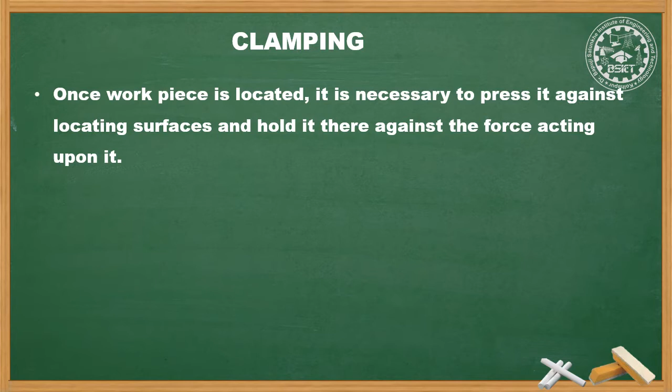Starting with clamping. Once the workpiece is located completely, it is necessary to press it against the locating surface and hold it there against the force acting upon it. For this purpose, clamping is necessary. The tool designer refers to this action as clamping, and the mechanisms used for this action are known as clamps.

To restrict the workpiece completely, a clamping device is necessary in addition to the locating device in a jig and fixture. A clamping device holds the workpiece securely in the jig or fixture against the force applied over it during an operation. A clamping device is incorporated into the fixture with a proper clamp, and it increases the accuracy and quality of the work done and reduces the production cycle time.

The basic requirements of clamping devices are: it should be rigid to hold the workpiece. The clamp pressure should be enough to overcome the operating pressure applied on the workpiece. The clamping device should be unaffected by the vibration generated during the operation. To handle workpieces made of fragile material, the clamping unit should be equipped with fiber pads. Clamping pressure should be directed towards support surfaces.

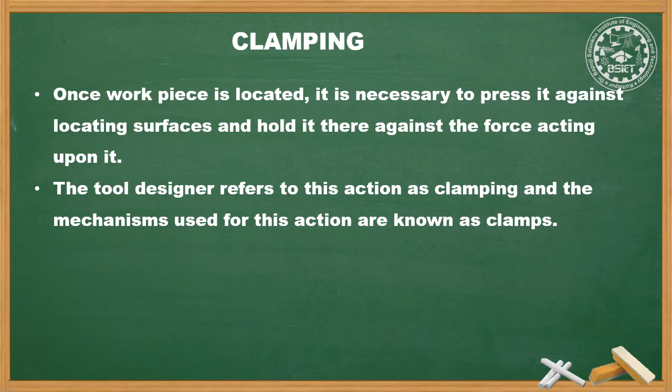Clamping faces should be hardened properly to minimize wear and tear and to increase the life of the clamp. Clamping force should act on heavy parts and against the supporting and locating surfaces. The clamping method should be foolproof and safe. It should also be inexpensive and reliable, and it should not be affected by the vibration, chatter, or heavy pressure caused by machining. The way of clamping and unclamping should not hinder loading and unloading the workpiece in the jig and fixture. So these are some basic requirements of clamping.

The principles of clamping are: number 1, position. Position is the main point. Clamping should be positioned at the thick section of the workpiece. It should be positioned to direct the clamping force on a strong part of the workpiece. Clamping on an unsupported part will bend it and affect the accuracy of the operation. So position should be taken into consideration while clamping. Clamping should not obstruct loading or unloading of the workpiece. The operator should be able to clamp the workpiece and remove it easily and safely.

Next is strength. The clamping system should be capable of holding the workpiece securely against the forces during operation. The clamping device should be unaffected by the vibration generated during an operation. The clamping force should not damage the workpiece. For clamping weak and fragile workpieces, the clamping force should be equally distributed over a wider area of the workpiece.

Third is productivity. Clamping time should be minimum so that we can increase the productivity. It can be minimized by using hand knobs, tommy bars, knurled screws, hand wheels and handles, so that clamping is easier, and tightening or loosening can be done manually without using spanners. And last is operator fatigue. Operator fatigue should be taken into consideration; if the operator is feeling fatigue while clamping the workpiece, then the clamping should be replaced.

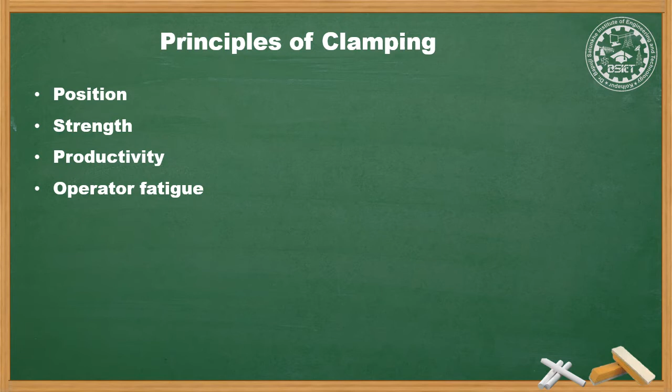The next part is types of clamp. First is the screw clamp. As shown in the figure, the screw clamp is nothing but a threaded device with a collar and hand knob, and can be used for light clamping. The clamping area of the screw is increased by providing a pad. The clamping pad remains stationary on the workpiece while the screw rotates and rubs on the conical seat of the pad. The disadvantage of the screw clamp is that the clamping pressure is less and varies from one workpiece to another, and it is also time consuming and requires more effort.

The next is the strap, or plate, or bridge clamp. These are a very effective method, made of rectangular plate, and they act like levers. The clamps are tightened by rotating the hexagonal nut on a clamping screw. One end of the clamp presses against the workpiece and the other end on the heel pin. The clamping face of the clamp is curved so that it does not deteriorate the workpiece.

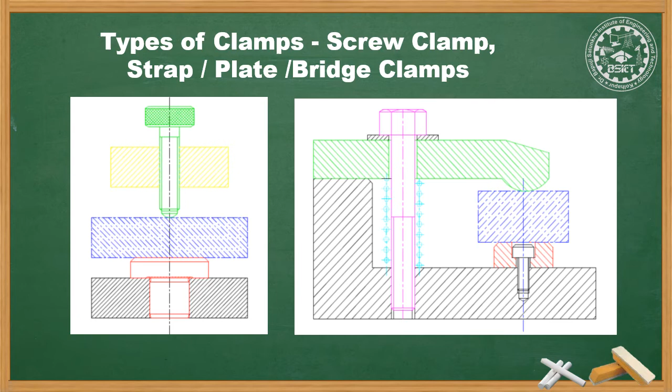The next type of clamp are retractable strap clamp and edge clamp. The retractable strap clamp, as shown in figure, is a modified version of strap clamp. In this, when the clamp falls in the loading and unloading path, they are made slotted to permit the linear withdrawal. That is, the clamp is retracted to the position shown by the dotted line during loading and unloading of the workpiece, as shown in figure.

During the loading and unloading of the workpiece, the clamp moves in a retracted position and we can easily load and unload the workpiece. Slotted clamp plate so that workpiece can be released without clamp rotation.

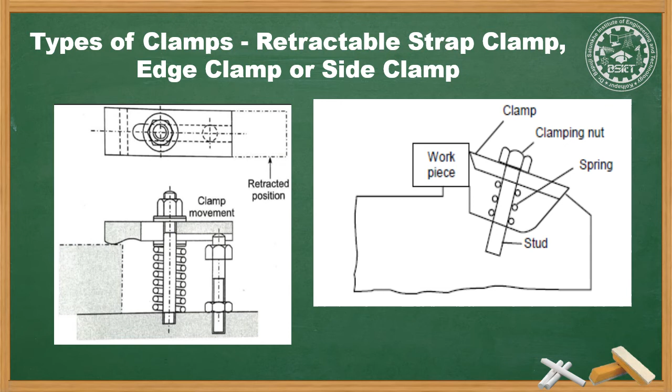The next is the edge or side clamp. A side clamp, also known as edge clamp. In this case, the surface to be machined is always clamped above the clamping device. This clamping device is recommended for fixed length workpiece. The clamping device, as shown in figure, releasing and clamping of workpiece can be accomplished by the unscrewing and screwing of clamping nut, as shown in figure, respectively. The side clamp is usually used for heavy or long range workpiece.

The next type of clamp is pivoted strap clamp. As shown in figure, clamps are often pivoted at center to simplify the operation. Knurled headed screw is used to loosen and tighten the clamp. Pivot pin is near the clamping point. Screw is shifted to the end opposite the clamping point. Clamping screw becomes more accessible to the operator.

Whenever we have to unclamp the workpiece, the screw is loosened, the clamp is moved and the workpiece is removed. And whenever we have to fit the workpiece, the clamp applies the pressure when we tighten the screw. This type of pivoted strap clamp is used more as it is easily accessible to the operator, and it also reduces the operator fatigue.

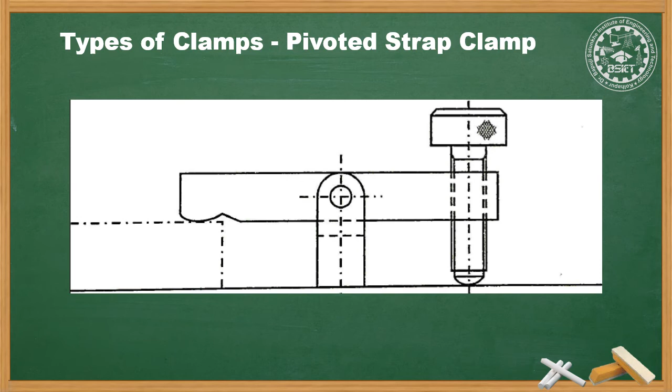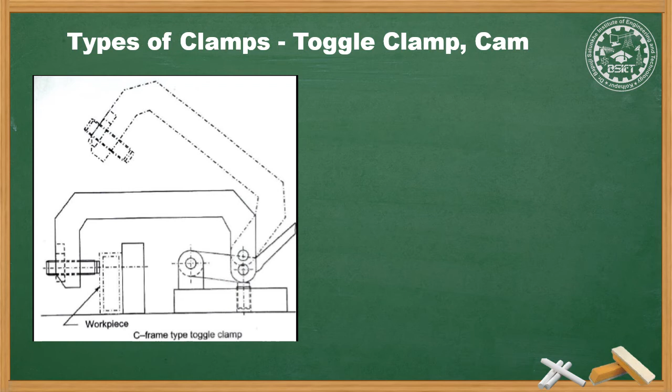The next type of clamp is toggle clamp and cam clamping. As shown in figure, the C-type toggle clamp. This type of clamp provides considerable distance for loading and unloading of the workpiece. The C-frame can be swung to the position shown by dotted line in the figure. The pusher type toggle clamp withdraws backward during clamping. Toggle clamps are provided with clamping screws to accommodate workpiece variation. The C-frame moves as soon as we press the lever, and we can accommodate different size of workpiece by adjusting the frame.

Next is the cam type. Quick clamping by cam is very effective and very simple in operation. The cam type clamping is used for clamping through some interior parts where other simple systems will not have access. Cam shifts its mating surfaces to clamp and unclamp the workpiece. Cam clamping is a fast, effective method for clamping workpiece and increases the productivity.

The cam is having a circular shape and is pressed against the simple pivoted strap clamp, and whenever we press the handle, we can apply the force on the clamp, and whenever we want to remove, we can shift the cam. This is used for the parts where the workpiece is hard, or where the workpiece is having difficulty to be clamped. This is the easiest and quickest method.

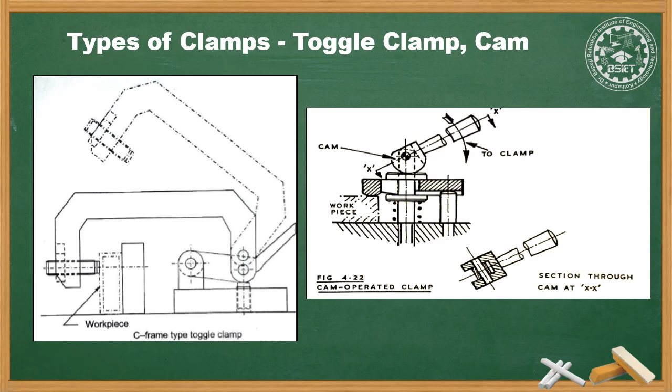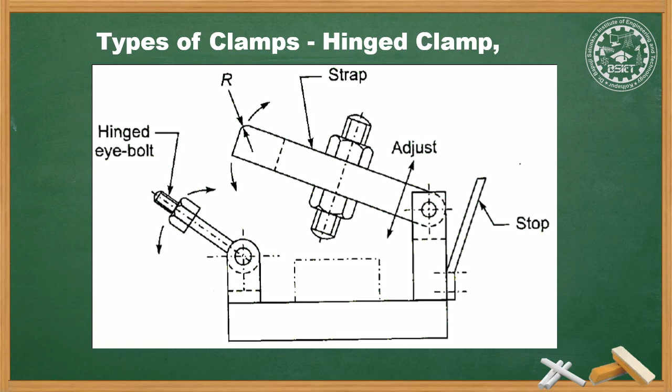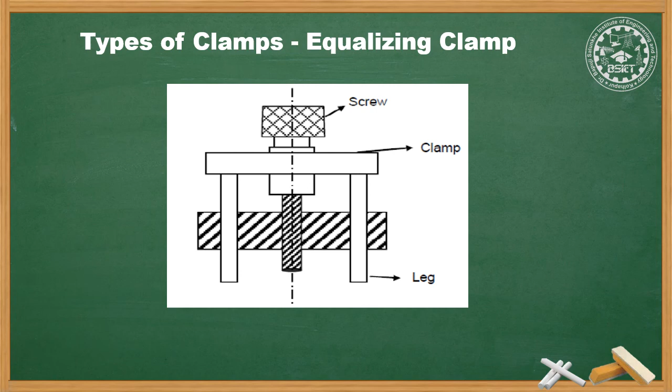Thank you. This is for today's session. In this session, we had covered a lot of points of clamping, principles of clamping, and the different types of clamp. This part of clamping is important as the further chapter is based on it, that is your jig and fixtures.